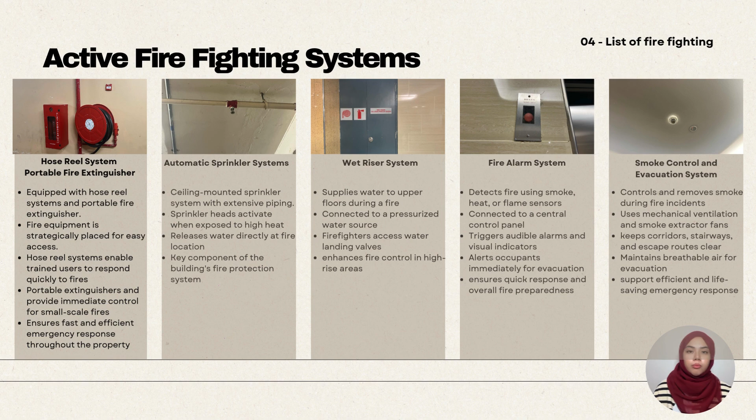The next one is smoke control and evacuation systems. It is to control and remove smoke during fire incidents. It uses mechanical ventilation and extraction fans to keep corridors, stairways and escape routes clear, and also to maintain breathable air for evacuation. It supports efficient and life-saving emergency response.

Next is passive firefighting systems. The first one is the fire door. The fire door acts as a barrier to prevent fire and smoke spread. It is made from fire-resistant materials, and mostly fire doors are installed in corridors, stairways, and exits to help maintain safe escape or emergency routes.

The next one is emergency signs. Emergency signs are strategically placed for clear evacuation guidance, bright and highly visible for easy identification, so that occupants will go directly to the exit during an emergency, to support fast and orderly evacuation.

The third one is the protected escape staircase. It is designed to ensure safe evacuation during emergencies, with fire resistant construction to withstand high temperatures, to keep escape routes clear and protected from smoke and fire, and also to allow for orderly evacuation of occupants.

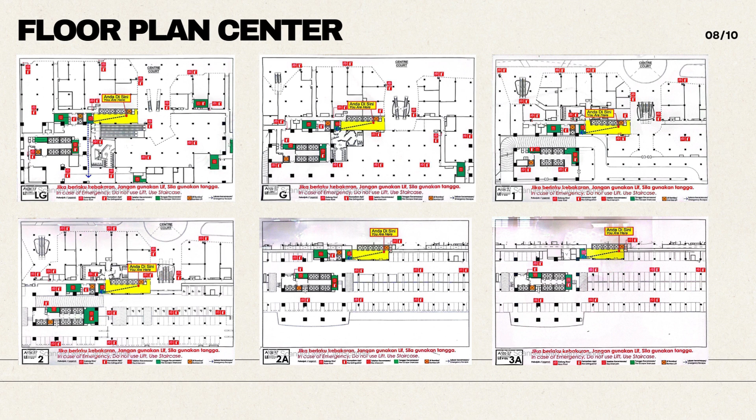The effectiveness of the safety features. Mid Valley Southkey in Johor Bahru is a major mixed-use development incorporating retail, commercial, hospitality, and also residential elements. Being a public environment of large size requires efficient safety and security intervention to ensure the well-being of visitors,

tenants, and also employees. For comprehensive security measures, number one is the surveillance and monitoring system, positioned strategically around the facility's public spaces, car parks, lifts, entrances and exits with high definition CCTV cameras, and the system is watched around the clock by trained security officers on a 24/7 basis to permit real-time viewing and quick response to incidents. Access control and surveillance are enhanced through the use of facial recognition and automatic number plate recognition, which is ANPR

technology. Number two is access control and entry management. Points of entry are important and contain card entry systems and security gates. Office and residential units have private entrance systems that limit access by unauthorized individuals.

And next, emergency response infrastructure. Mid Valley Southkey has fire detection and suppression systems, including smoke detectors, sprinklers, and also hydrants in line with local building code. Adequate emergency exits are provided, and evacuation drills are held regularly to train staff and also

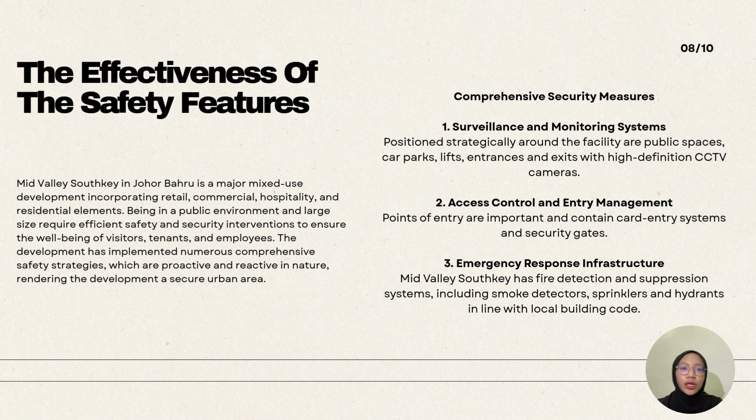Adequate emergency exits are provided, and evacuation drills are held regularly to train staff and also tenants. Next, design and infrastructure enhancement. The Mid Valley Southkey architectural and infrastructure design has a futuristic appearance that takes into account not only aesthetics and usability, but even future-proof safety, accessibility, and comfort of the user.

Number one is barrier-free design in compliance with Universal Design Principles and the national standard, which is MS 1184. The building features ramps, tactile signage, disabled-friendly lifts, and also reserved parking for the disabled. Such accessibility provides safety and independence for all users in moving around the spaces.

Number two is emergency access and egress planning. Corridors, staircases, and also access routes are designed for convenient evacuation during emergencies. Third is sustainable drainage and flood mitigation. In light of the possible threat of flash floods in the city location of Johor Bahru, the development also utilizes sustainable drainage (SUDS), elevated floors and perimeter drainage that reduce the retention of surface water and flood susceptibility.

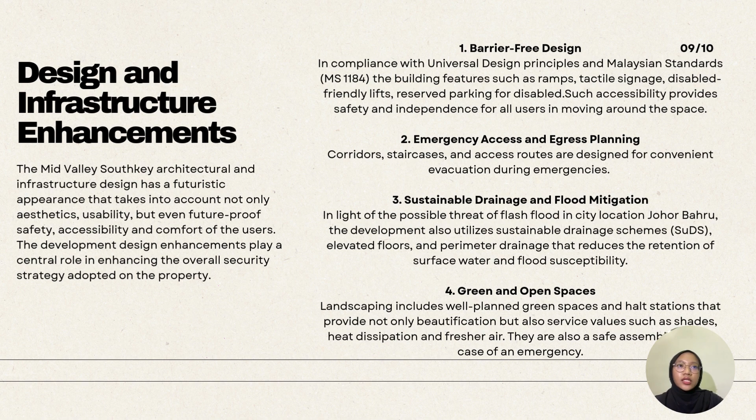And last but not least, green and open spaces. Landscaping includes well-planned green spaces and halt stations that provide not only beautification but also service values such as shade, heat dissipation, and also fresher air. There are also safe assembly areas in case of an emergency.

So next, I will explain how the building design supports fire safety by assessing both strengths and weaknesses based on UBBL clauses. These include emergency systems, evacuation planning, occupancy load, and escape strategies. For emergency power and lighting, which is UBBL Clause 152A, the mall is well equipped with exit signs and emergency lighting, aiding safe evacuation during blackouts. However, the system's effectiveness relies heavily on proper maintenance of the batteries and generator; any oversight could lead to critical failures during an emergency.

So next, for the fire detection and alarm system, which is UBBL Clauses 225 until 228. The strength lies in having advanced detectors and a centralized alarm system that support quick response. The main weakness is the need for ongoing maintenance by tenants and the manager, as outlined in Clause 228, to ensure the system stays reliable.

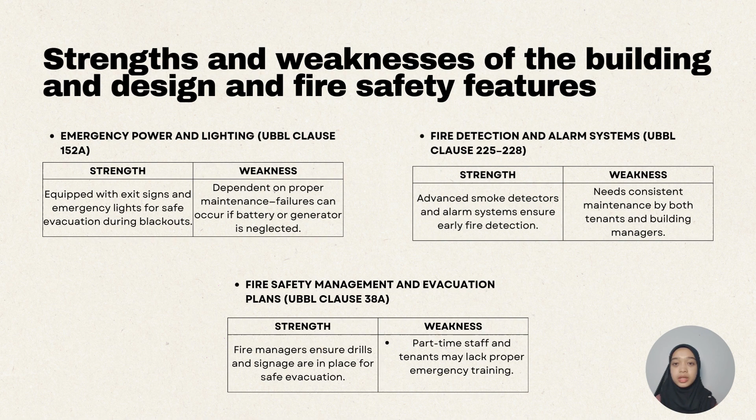And the third one is fire safety management and evacuation plan, which is UBBL Clause 38A. A large mall like Mid Valley Southkey benefits from a trained fire safety manager and routine evacuation drills. The downside is inconsistent training for part-time staff or tenants, which may compromise emergency response and effectiveness.

Next one is building classification and occupancy load, which is UBBL Clauses 133 and 134. The design integrates diverse functions and follows occupancy guidelines, ensuring multiple exit points for safety. During peak periods, overcrowding may exceed safe limits, causing non-compliance risks.

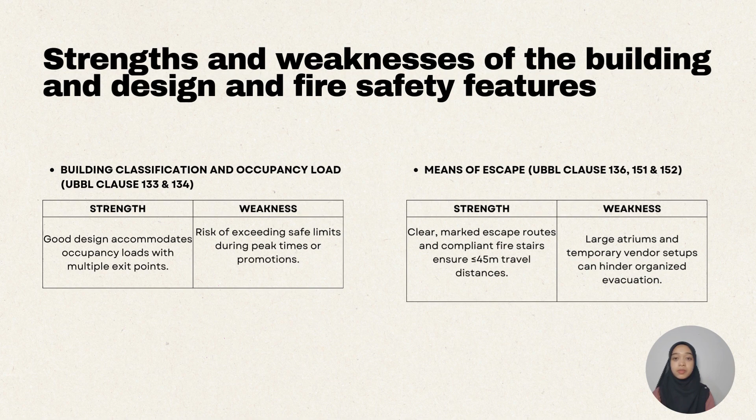Next one is means of escape, which is UBBL Clauses 136, 151, and 152. Escape routes are clear and comply with the UBBL standard, exits are within 45 meters and fire stairs follow code, but the wide atrium and escape paths blocked by pop-up vendors could disrupt smooth evacuation.

Strengths and weaknesses of the building design and fire safety features. Smoke control and ventilation, UBBL Clause 242. Strength: high ceilings and atriums are effective for natural smoke ventilation, especially when combined with mechanical smoke extractors. Weakness: well-maintained ducts are crucial in enclosed retail spaces, as they may not have a direct smoke outlet.

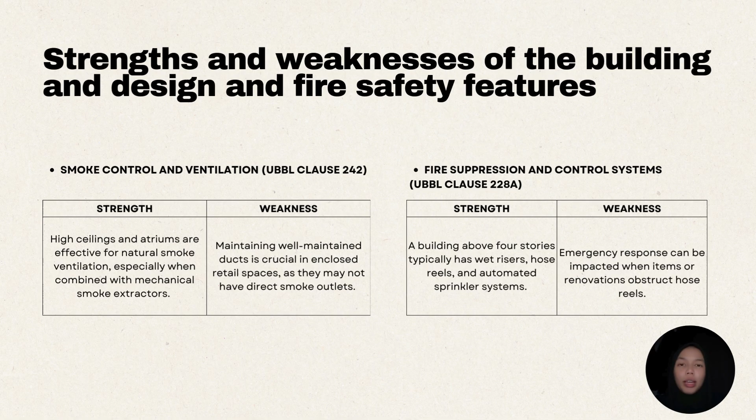Fire suppression and control system, UBBL Clause 228A. Strength: a building above four storeys typically has a wet riser, hose reel and automated sprinkler system. Weakness: emergency response can be impaired when items or renovations obstruct the hose reel.

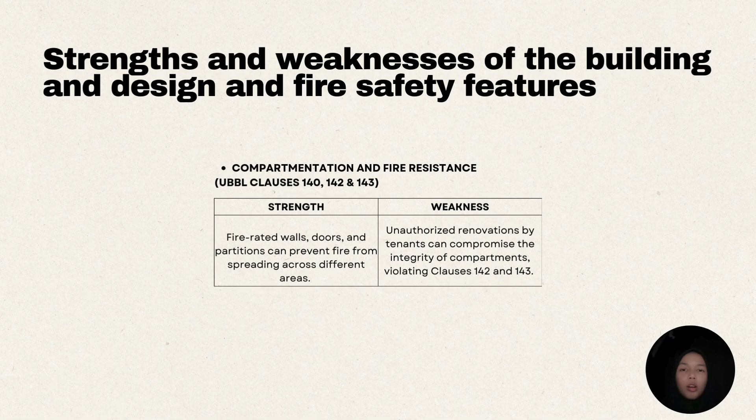Compartmentation and fire resistance, UBBL Clauses 140, 142, 143. Strength: fire-rated walls, doors and partitions can prevent fire from spreading across different areas. For weakness, unauthorized renovation by tenants can compromise the integrity of compartments, violating Clauses 142 and 143.

And for the advantages, fire safety features at Mid Valley Southkey offer several important advantages. They help protect life and property, ensure compliance with Malaysian building laws, and support business continuity by reducing disruption during emergencies. This system also boosts public confidence, lowers insurance costs, and helps preserve the building's structural integrity.

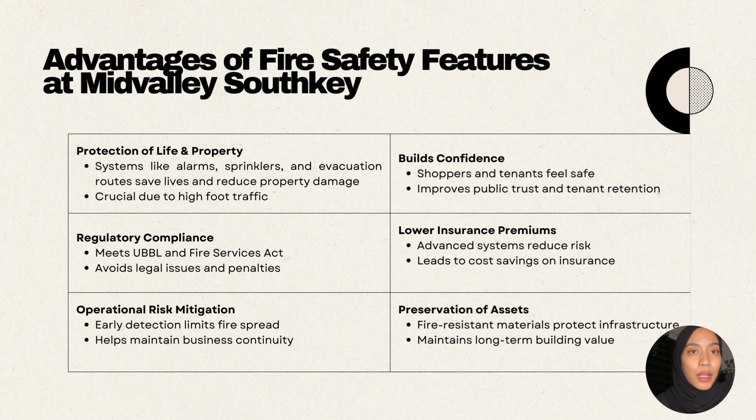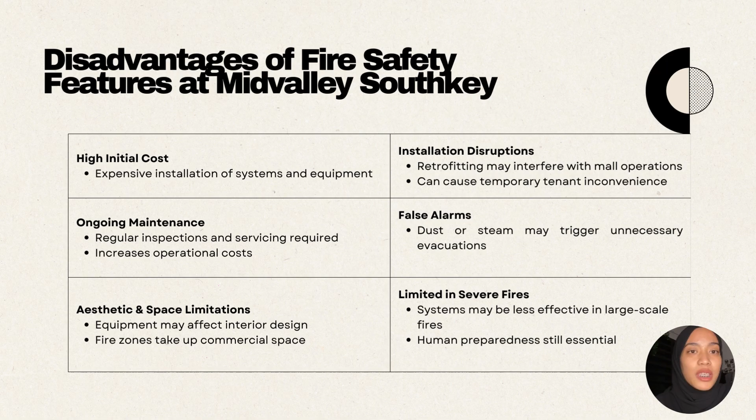However, there are also some disadvantages, such as high installation and maintenance costs, possible aesthetic and space limitations, and disruption during upgrades. Fire systems may also trigger false alarms and have limited effectiveness in large-scale fires. Therefore, while fire safety features are essential, they must be supported by trained staff and proper emergency planning for maximum effectiveness.

And for the discussion, Mid Valley Southkey is a good example of how fire safety can be well integrated into a mid-rise commercial building with high foot traffic and mixed-use spaces. It uses fire alarms, sprinklers, smoke detectors, and clear exit routes to ensure safety following UBBL and the Fire Services Act. These systems are designed to blend with the building's looks and functions.

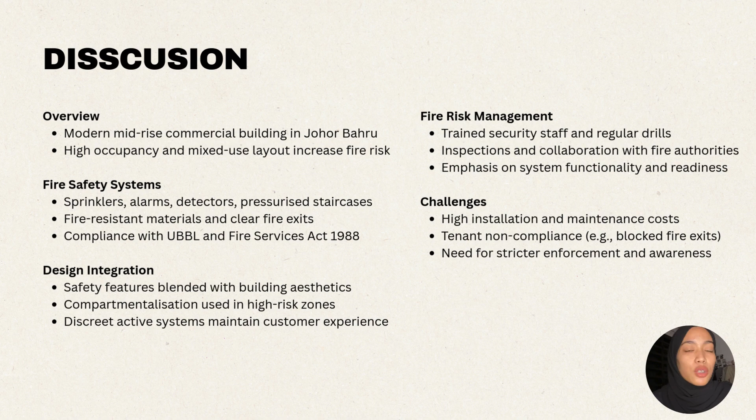High-risk areas like kitchens are separated using fire-resistant walls. Regular drills, trained staff, and inspections help keep everything ready. However, challenges include high costs and tenants blocking exits, showing the need for better enforcement and awareness.

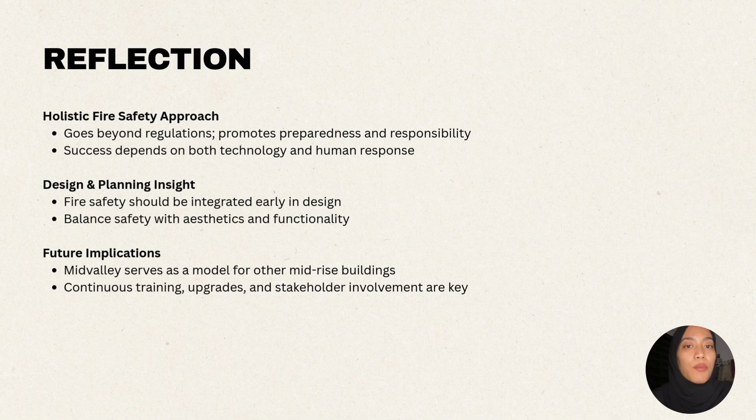And for the reflection, this case study shows that fire safety isn't just about following rules, it's about being prepared and responsible. Good design, regular training, and teamwork between management and tenants are all important. Mid Valley Southkey proves that safety can work well with design, and future buildings can learn from its approach.